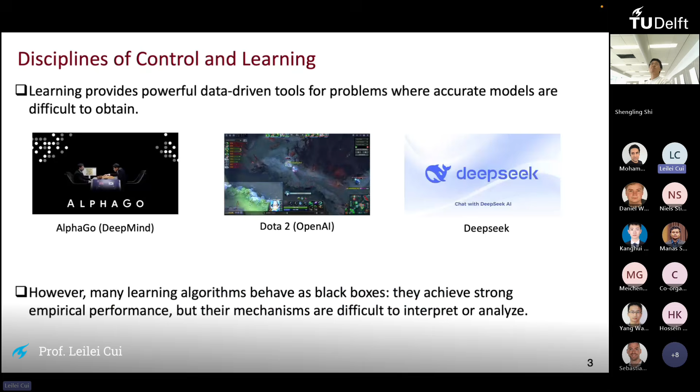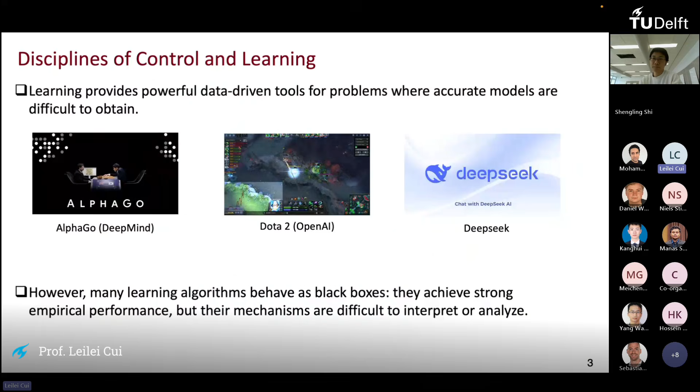For this kind of scenario, there is no model, but the data-driven method had very good performance. Even now we have very good success in the application of learning, but our understanding or knowledge about learning lags behind the development of learning. Many learning algorithms behave as a black box, achieving very good empirical performance, but their mechanisms are very difficult to interpret or analyze.

Based on the advantages and disadvantages of these two disciplines, my perspective is: how can control benefit learning, and vice versa, how can learning benefit control? On the one hand, we have different kinds of ideas in control theory. Can these well-established tools be applied to learning, or to better understanding learning algorithms?

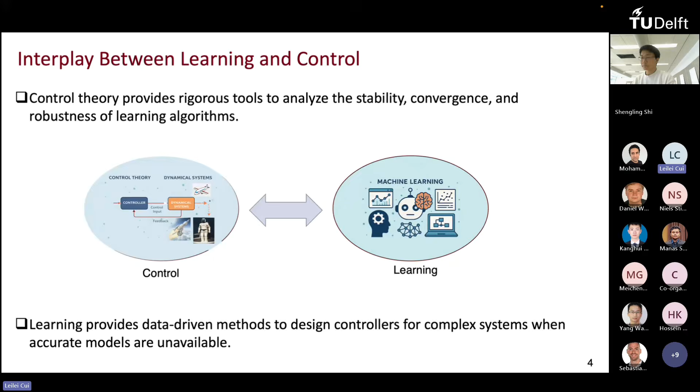On the other hand, even in the learning field, even without a model, we can have very good performance. Can we bring this idea to control and propose some data-driven solution to controller design? For example, even without a model, can we directly learn from data the best controller? That's another direction, from learning to control.

Within this intersection, I have done some work. The first direction is control for learning. Different people may have different ideas and perspectives on this, but from my perspective, I think control is a very good tool to analyze the robustness of learning algorithms.

Usually, learning algorithms depend on data, and usually data is noisy. How can a learning algorithm perform under the influence of noisy data? It should degrade elegantly in the face of perturbation—that's the purpose of robustness of a learning algorithm. In this direction, we propose a framework under input-to-state stability, and based on this framework, we study the robustness of policy optimization algorithms and even adversarial reinforcement learning algorithms.

In the other direction is learning for control. Reinforcement learning, especially, can help us directly learn from data the optimal controller. This controller not only should be optimal, but also should be stable. In this direction, I propose some algorithms for time delay systems and for output feedback systems.

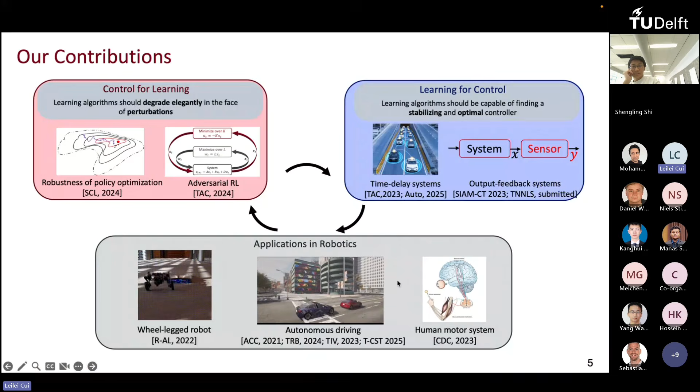In terms of applications, I have applications of data-driven control in robots and autonomous driving, and we also use reinforcement learning algorithms to explain computational neuroscience, proposing some ideas in computational neuroscience in terms of human motor systems. Okay, so today let's begin the first part of today's talk.

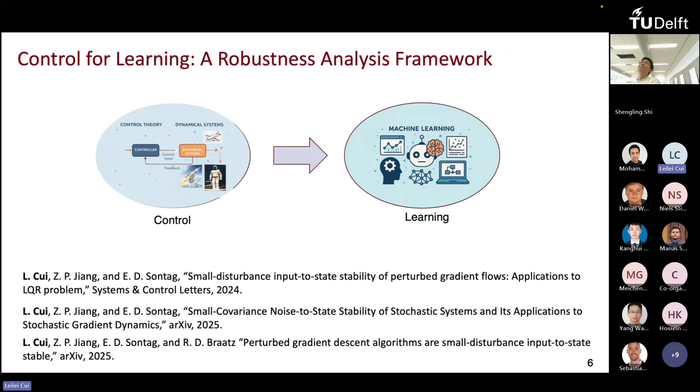The first one is control for learning. Here, as I mentioned, we propose some ideas based on input-to-state stability to analyze the robustness of learning algorithms. Today's talk is basically based on these three papers, a collaborative work with my PhD advisor, Zhongping Jiang, and Eduardo Sontag, and also with my postdoc advisor, Richard Braatz.

I wanted to study the behavior of learning algorithms. But in machine learning there are so many different kinds of learning algorithms—so where should we start? I think even though there are various learning algorithms, the fundamental solution is optimization. Even for classic learning algorithms like classification or regression, or later for reinforcement learning, supervised learning, or even unsupervised learning, they all come from an optimization algorithm.

For example, for backpropagation in deep neural networks, we use gradient-based algorithms to solve the optimization problem. So we aim to study the following optimization problem: J is our loss function or objective function, D is the domain of this objective function, and k is the decision variable. We want to find the k such that J is minimized. Of course this problem is typically non-convex—if it were convex we'd have very good properties, but generally this function is non-convex.

To solve this problem, we have a very simple and very useful algorithm to find the optimal solution iteratively: the gradient-based method. Gradient-based methods are very powerful but very simple—at each step we just move along the gradient descent direction, and by this way we can ensure that the cost or loss function can be minimized iteratively. From here we can see that if eta, the step size, is super small...

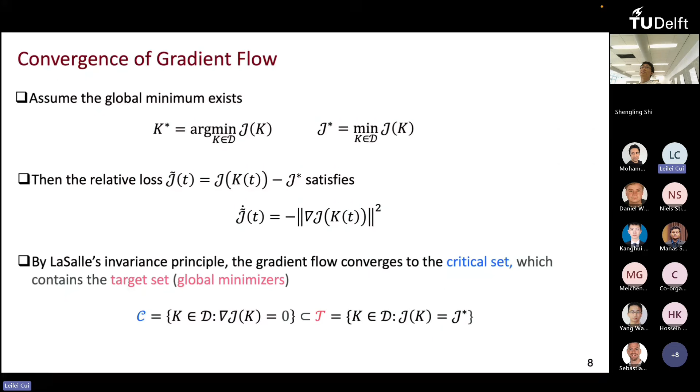Actually, we wanted to find the global minimizers, but due to the limitations of the gradient-based method, usually we can only converge to the critical set, the points where the gradient should be equal to 0. So that's some basic introduction of the gradient-based method.

But here, as I mentioned, this part is usually implemented by our algorithm. For example, there may be some oracle - you ask your oracle, and the oracle will give us some estimation. Or maybe it is a digital twin, so we can ask a digital twin about the estimation of the gradient, and then it will tell us the result. Or maybe in this part there is some data - even though we don't know the model and can't get the exact gradient, the data would help us to calculate the gradient. So in a word, in machine learning, usually the gradient should be estimated by some algorithm.

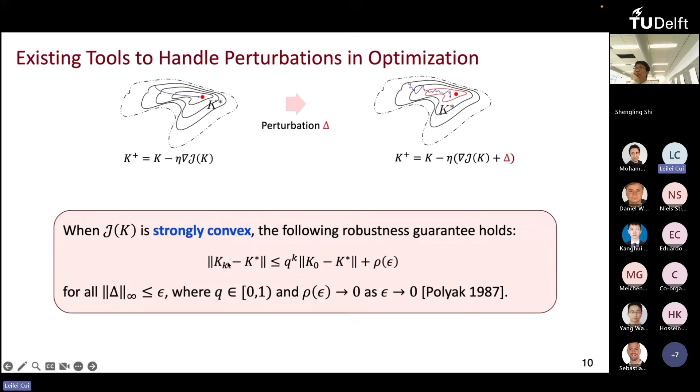Next, of course, there are many other brilliant works. The second work is done by Bertsekas and Tsitsiklis around 2000. In their work, they assume that the noise should converge to 0. As we can see, eta is the step size, so they assume that the step size should converge to 0.

If the step size converges to 0, based on this equation, we find that the perturbation should also converge to 0. So in their work, if the perturbation converges to 0, they can also ensure that the gradient converges to 0 too. Okay, so that's another work.

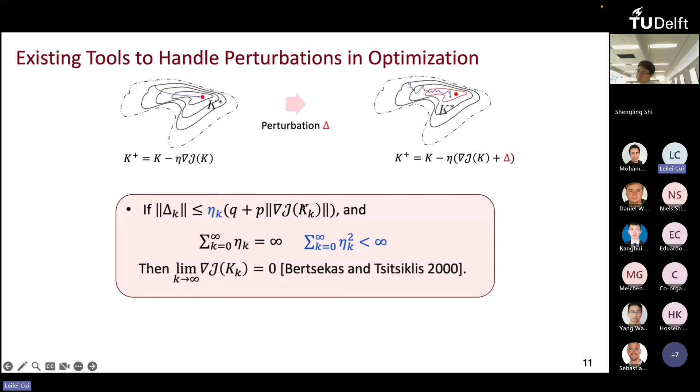But here the limitation is that they assume convergent noise. We can see here it requires the convergent noise assumption. In both of these works, the first assumption is strong convexity. But in many practical problems, many optimization problems are non-convex, let alone strongly convex.

So for example, here I will give you an example: the policy optimization for the linear quadratic regulator problem. Here we want to optimize the feedback gain K. The set of stabilizing controllers, or the feasible set, is non-convex. Look at this figure — the blue region is the feasible set and the yellow one is the non-stabilizing or non-feasible set. We can see that the feasible set is non-convex, and therefore this kind of problem is non-convex.

Secondly, in data-driven control, the assumption of vanishing noise is often unrealistic. It's hard to say that after a long time, the noise will tend to zero, that the noise will vanish. From our understanding, noise would be there all the time, so this kind of assumption would be too strong to be satisfied by real scenarios.

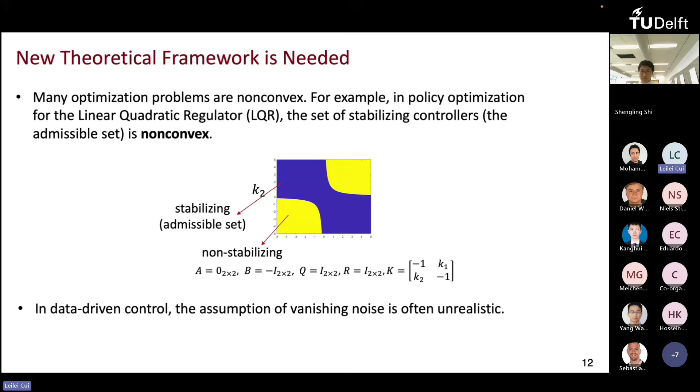So how can we propose some new ideas to solve this problem? How can we propose new ideas to study the gradient descent algorithm under the influence of noise? The first technique we introduce is input to state stability, to quantify robustness. Robustness is a kind of quality property, but how can we quantify it? Here we use input to state stability.

I think, because I'm a control researcher, the first concept I learned in control is Lyapunov stability. Lyapunov stability tells us that for any dynamical system without noise — so here without input, there is a zero input — if my Lyapunov function is negative definite, I can ensure that the trajectory of this dynamical system would converge to zero. In other words, it is asymptotically stable. That's the classic Lyapunov stability.

But as I mentioned, we wanted to study the behavior of gradient-based methods under perturbation. The classic Lyapunov stability only ensures asymptotic stability under zero input or zero disturbance. On the other hand, input to state stability can incorporate the influence of the noise.

So here on the right-hand side, W is non-zero input or non-zero disturbances. For input to state stability, we still have a similar dissipativity, like a Lyapunov condition. So in order to ensure input to state stability, we should still ensure that the derivative of the Lyapunov function should be negative, or more strongly, smaller than a K infinity function. But under the influence of noise, we should have an additional term.

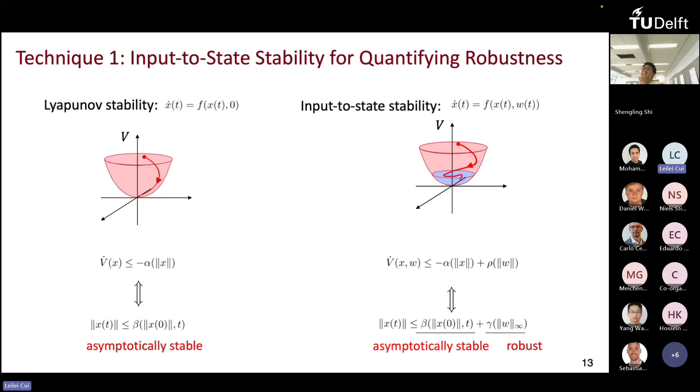That's why we should use input to state stability to quantify the robustness of the gradient-based algorithm. The second technique we use is generalizing the classic Polyak-Łojasiewicz condition. The PL condition was proposed around 1963, and it is used to guarantee the convergence rate of the gradient-based algorithm.

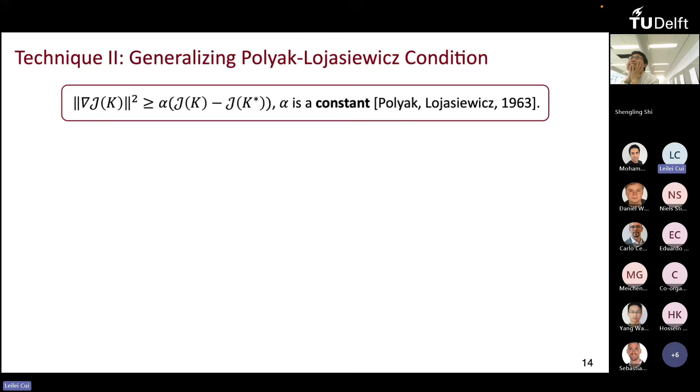So basically, the PL condition, or as some people like to call it, the gradient domination condition - here we can see that the gradient will dominate the relative loss function. The x-axis is the relative loss function, and the y-axis is the gradient. We can see that the gradient is larger than the relative loss function by a linear function, where alpha is some constant.

So if this kind of PL condition holds, we can easily derive that our relative loss function will converge to the optimality exponentially. But if we move a step further, we find that if this kind of linear Polyak-Łojasiewicz condition holds, then the gradient descent algorithm is exponentially input-to-state stable. So here we can see that without noise, in this equation, the algorithm will converge to the optimality exponentially.

But with noise, it will never converge to the equilibrium or to the optimality, but will converge to some neighborhood of the optimality. Here, gamma determines the size of our neighborhood. This can be easily proved by using this as the Lyapunov function.

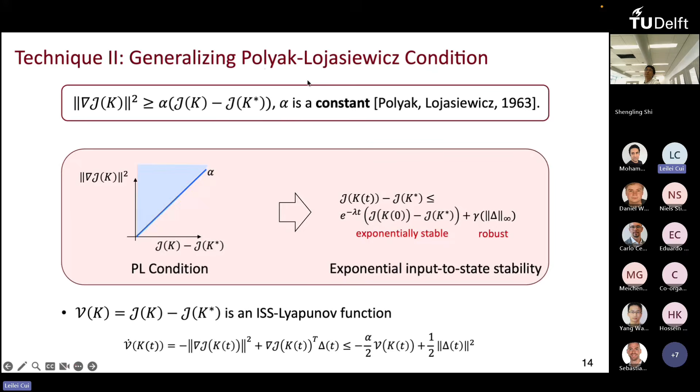We can see that the classic PL condition requires that the gradient is larger than the relative loss by a linear function. But as we know, in reality, linear relationships rarely happen, because a linear function is usually an idealization of our research, of our human understanding. But in reality, most properties of most things are nonlinear. So the question is, how can we generalize the PL condition such that it fits a broader range of problems?

That's the motivation for the K infinity PL condition. Based on the PL condition, we generalize to the K infinity PL condition. It's still the same equation, but here we only assume that alpha is a K infinity function, which implies that this alpha function is strictly increasing from 0 at 0 and tends to infinity. That's this kind of K infinity PL condition.

Actually, it is a weaker condition than the linear PL condition. We can see in this figure it is not a linear function anymore. Of course, if alpha is a linear function, it will imply the K infinity PL condition. Therefore, the K infinity PL condition is a generalization of the linear PL condition to the nonlinear version.

So if this kind of PL condition is satisfied by the cost function, then we can ensure the input-to-state stability of the gradient flow. In other words, without noise, the learning or gradient-based algorithm is asymptotically stable. But under the influence of noise, it will still converge to a neighborhood of the optimality.

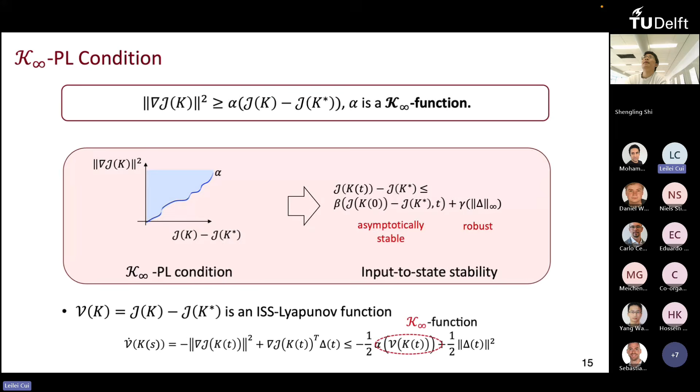But usually this kind of condition still can't be satisfied. So here I will give an example to show that the developed K-infinity PL condition is still too strong in some cases. Let's consider this optimization function, this loss function. We wanted to optimize the function at this kind of form - this is the objective function we wanted to optimize.

The right-hand side is the explicit formula for the gradient. We can plot this, because for this optimization problem it's very simple - it's like a toy example. We can directly scratch down the figure between the gradient and the relative loss. In the figure, we see that the gradient saturates when the relative loss tends to infinity. We can see that it saturates at 0.25.

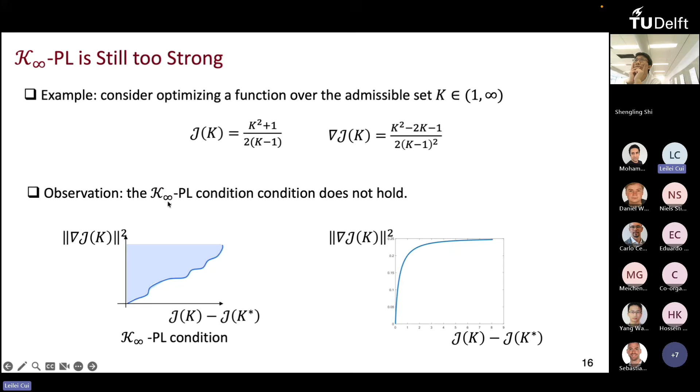That's the saturation value. But as I mentioned, in the developed K-infinity PL condition, it should be unbounded when the relative loss tends to infinity. So for this kind of problem, it can't satisfy the K-infinity PL condition. In other words, the K-infinity PL condition is sometimes too strong to be satisfied. Therefore, we should develop new conditions to relax the K-infinity PL condition. So that's the motivation of the KPL condition.

So for the KPL condition, we still have this kind of relation, where the gradient should dominate the loss function by some alpha function. This alpha is some function, but here we only require alpha to be a K function, which means it is 0 at 0 and strictly increasing - it can be bounded. Therefore, it is a relaxation of the K-infinity PL condition.

So if this kind of PL condition is satisfied, we find that the gradient algorithm has small-disturbance ISS. In other words, under this scenario, the noise should be bounded by this threshold. If the noise is smaller than this threshold, we can still have a very good robustness property, which tells us about the asymptotic stability of the algorithm. In other words, if noise is smaller than this threshold, the gradient algorithm can still converge to optimality asymptotically, but under the influence of noise, it will converge to a neighborhood of the optimality.

Of course, the size of the neighborhood depends on the magnitude of the noise. So that's another relaxation of the PL condition to the KPL condition.

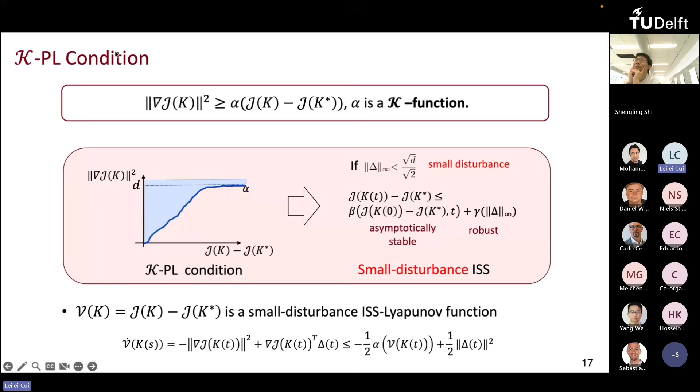So moving along this line, we can relax the PL condition again. In the KPL condition, we require the monotonicity of the alpha function. For the PDPL condition, alpha is only required to be positive definite, meaning it is 0 at 0 and positive when the relative loss is larger than 0.

Of course, under this scenario, we can ensure integral input-to-state stability, which means the gradient algorithm will converge to a neighborhood of the optimality, and the size of the neighborhood depends on the energy-like function of the noise. That's the idea of integral input-to-state stability.

So now we introduce the framework of the PL condition and input-to-state stability to analyze robustness of the algorithm. Now let's apply the developed framework to different kinds of problems.

So for this problem, we consider the policy optimization of the LQR problem. I think LQR is very classic. We wanted to minimize - we wanted to design a controller K such that the state of the system will be driven to 0 as soon as possible, but with less energy. This term denotes the energy of the inputs.

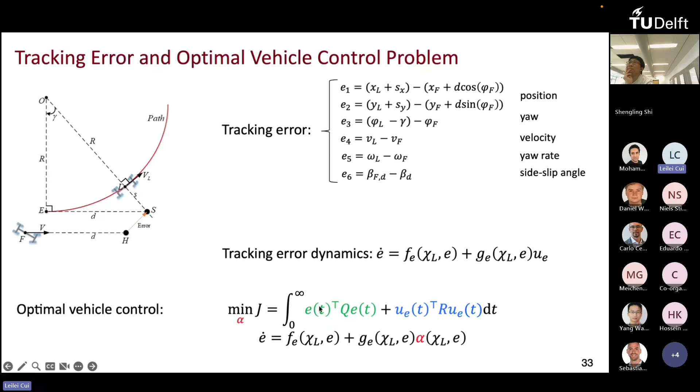This is tracking error for the virtual point, so that's the tracking error dynamics. We should design the controller such that the tracking error and the control input can be minimized to improve the performance and minimize the energy consumption. So here we develop the learning policy iteration algorithm to learn the optimal controller.

Different from classic reinforcement learning algorithms, here we consider the model of physics of the vehicle. Therefore we can ensure the algorithm is asymptotically stable, the controller learned by the proposed learning algorithm is globally asymptotically stable, and the value function is monotonically decreasing, which implies our performance is better and better. So that's the development of data-driven policy iteration.

So that's the result of the learning-based controller. The red vehicle is the leading vehicle, and the blue one is the autonomous vehicle or the following vehicle. We can see the follower will follow the leading vehicle very closely, but keep a very safe distance.

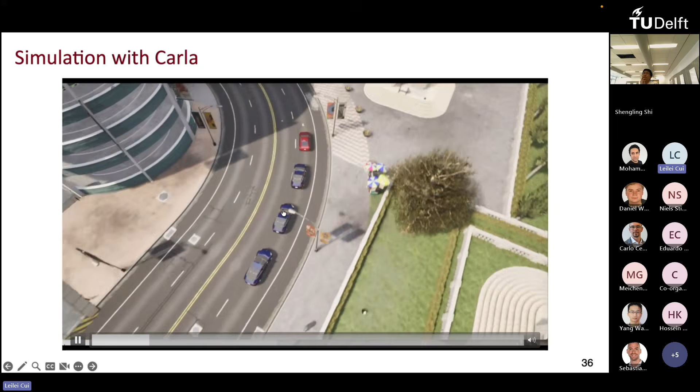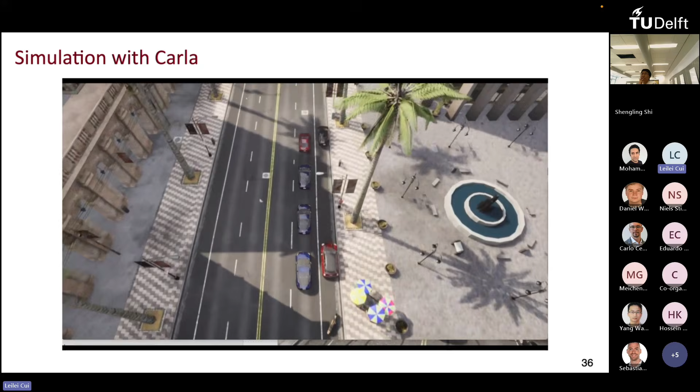We can also extend this idea to multiple vehicles. Here we can see there are 3 followers, and these vehicles are following the preceding vehicle. We can see that these autonomous vehicles can still keep a safe distance from the preceding vehicle and at the same time keep the lane. It will stay in the lane.

We also extend the idea of learning-based control to robotics. For example, we developed this kind of wheeled bipedal robot, where there's a wheel attached to the body of the robot. This kind of robot can operate under different modes, for example the general mode or the energy saving mode, which means the height of the robot can change. There is also a second tail which can serve as a 3-wheeled mode, and finally we can mount some manipulators on top of the robot.

Our task is to design the torque applied to the wheel such that the robot can be balanced. For this kind of task, we design the state, including pitch angle, angular velocity, and longitudinal velocity, and then define the quadratic performance index. We propose a data-driven value iteration algorithm to directly learn the optimal controller for this kind of system. Of course, since this is a data-driven algorithm, we require data from the system.

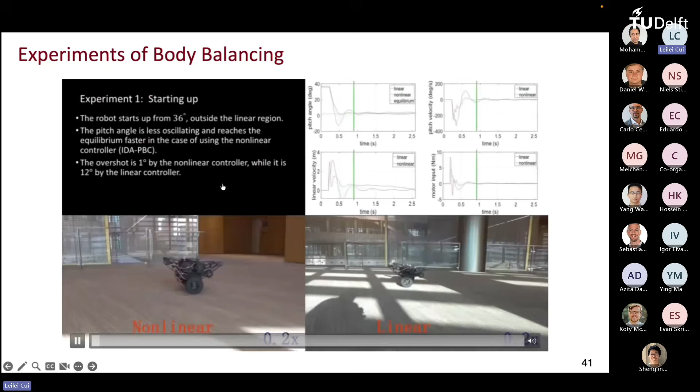Here are some results of the data-driven controller. The first result is starting up, and second is rotating. We can see that the robot is balanced very well by the learning-based controller.

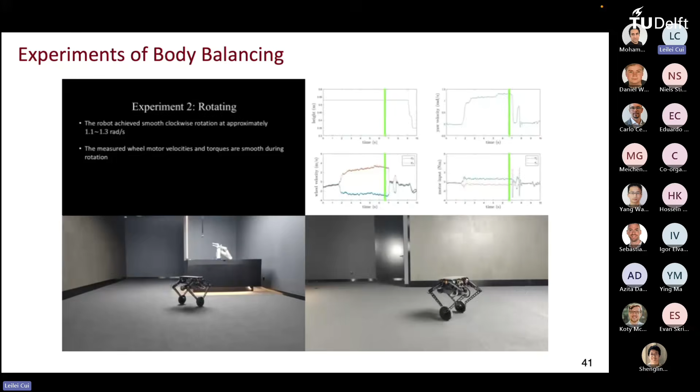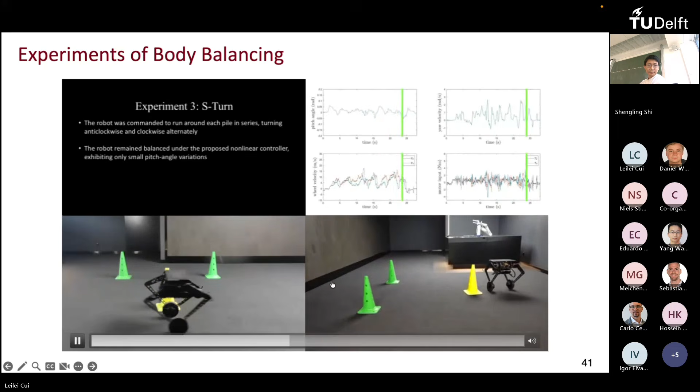The robot can still be balanced well when it is moving along some curves. And finally, in this scenario, we can see that the robot is balancing itself when its height is changing, to pass through these cones.

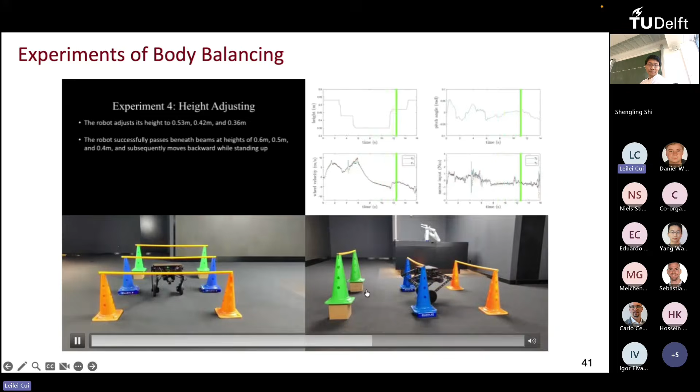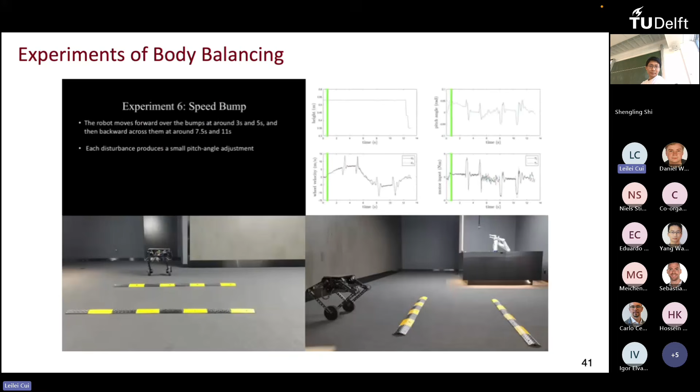Finally, when someone is kicking the robot, under this external disturbance, it can still be balanced well. And when the robot is moving through some speed bumps, it can still be balanced well.

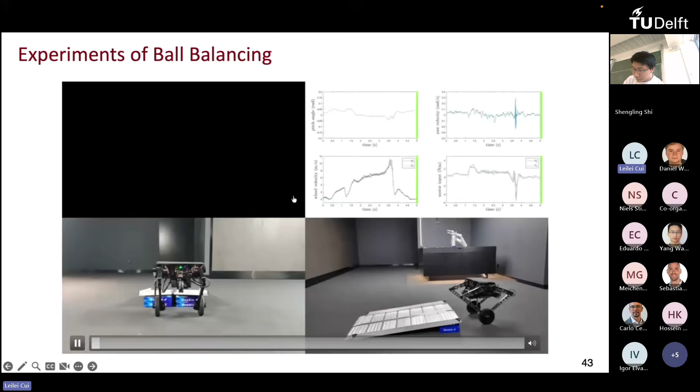By combining learning-based control with whole body control, we can also achieve more complex tasks. For example, here we not just balance the robot, but also balance a ball. This ball is on the top of the robot. If the control performance is not good enough, this iron ball will fall out of the robot.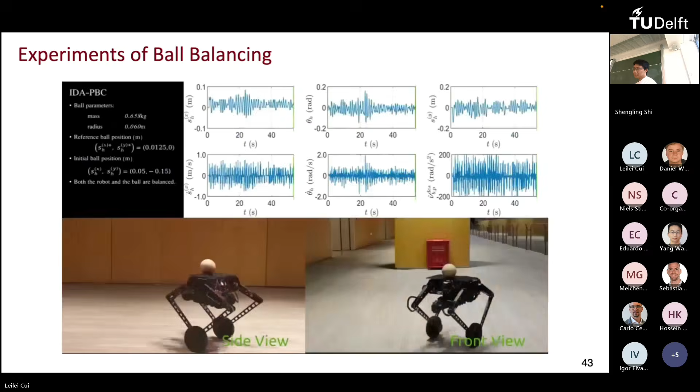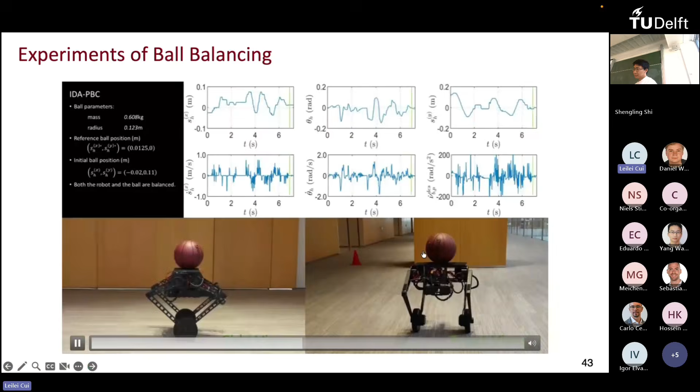We can also balance the ball if the material of the ball is changed, from iron to wood. That's a comparison between our controller and PID control. We can also balance a basketball, and we can also balance the ball when the robot is moving along some curves.

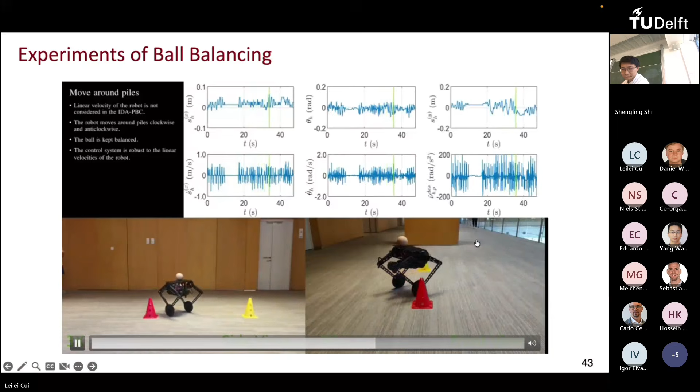And finally, another scenario is when the robot is moving over some obstacles or over some slopes, the ball can still be balanced well.

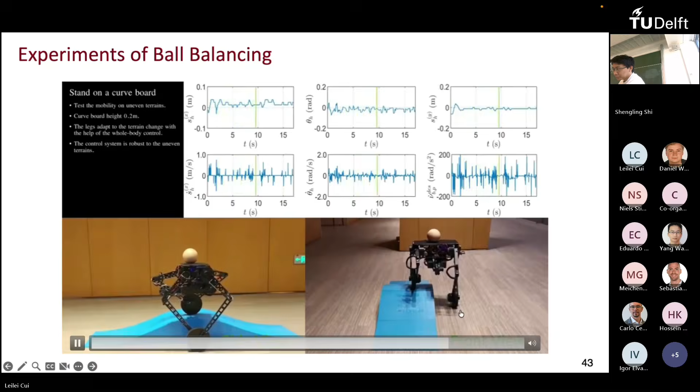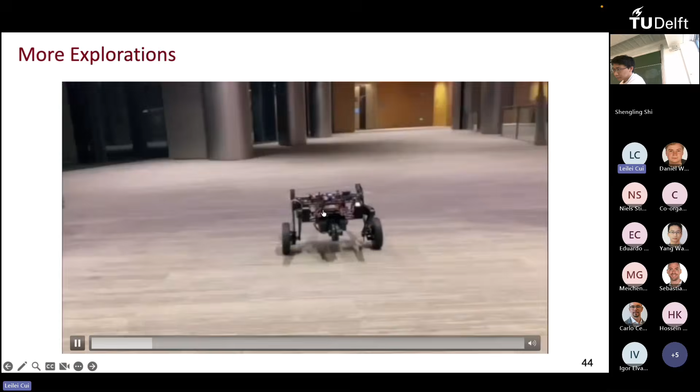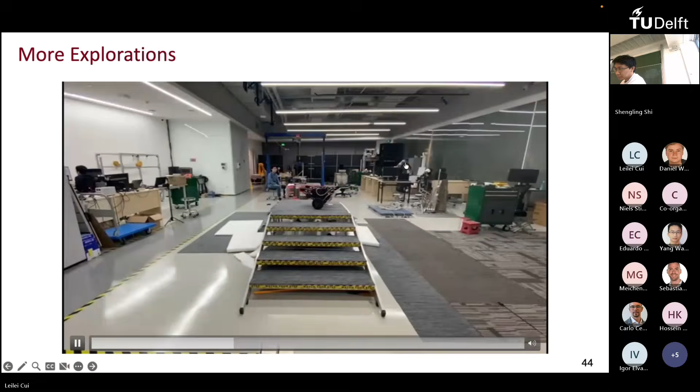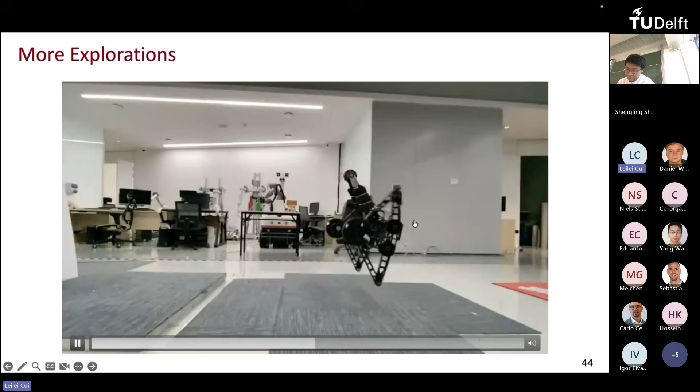We also explore some other experiment scenarios, for example passing through obstacles, jumping over a rope, jumping over some platform, moving downwards through the stairs, and performing a somersault. That's the learning-based control and the whole body control working together.

Okay, so we also studied reinforcement learning algorithms as a theory of human-centered motor control. Due to time limitation, I will end my presentation here. So in today's presentation, theoretically, we started with robustness analysis of the gradient learning algorithm, and we considered the dual loop policy optimization algorithm for the zero-sum dynamic game, learning-based control for output feedback systems, and learning-based control for time delay systems. In terms of applications, we talked about car following control, balance control for wheel-legged robots, and human-centered motor control. So that's it. Thank you for attending. Let me know if you have any questions so we can discuss.

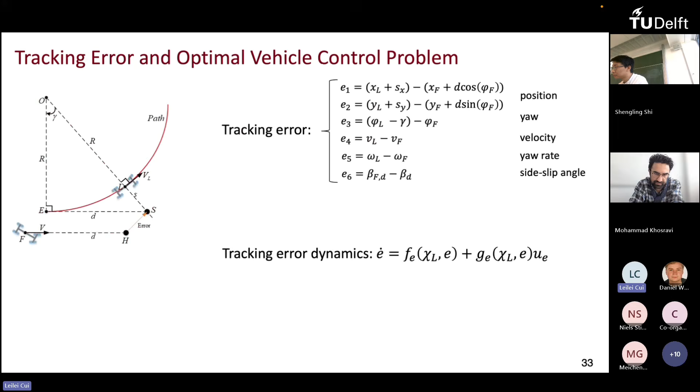Yes, okay. So here I think regarding restrictive, we should assume there is a global condition, so maybe we can go back to the PL condition. We tried our best to generalize the classic PL condition, but there are still other restrictive aspects, for example alpha here. If there are some local minima, other stationary points, this kind of condition can't be satisfied. So that's another restriction or drawback of this approach. For example, if there is a point where the gradient equals zero on the left-hand side but the right-hand side is non-zero, meaning relative loss is non-zero, then this PL condition can't be satisfied, and we can't use it to analyze results globally. If there are multiple stationary points, maybe we should analyze robustness locally. So that's one restriction.

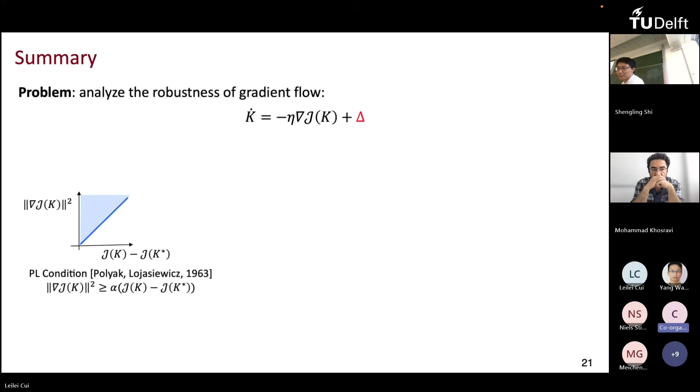Okay, maybe I can add one, Leilei. You mentioned you extended your result to the stochastic setting with Brownian motions. I'm wondering, because normally in machine learning optimization they use stochastic gradient descent where they estimate the gradient using a subset of data, do you think this Brownian motion setting covers that case? Yes, of course, I think you're right. Usually for stochastic gradient methods or batch/mini-batch gradient methods, we should introduce stochastic noise, so I think this can also solve this kind of problem, because if sampling is stochastic, the noise should also be stochastic.

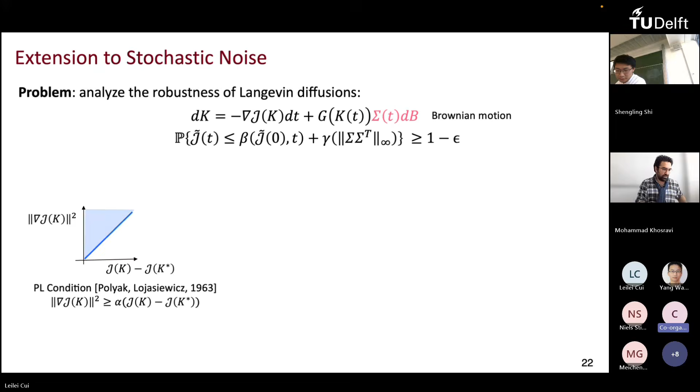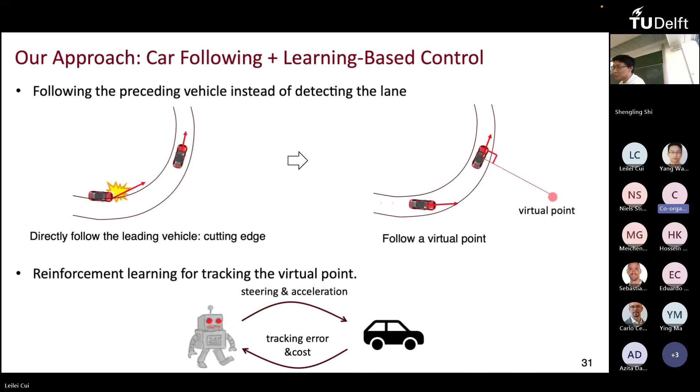Okay, great. And then maybe a second question is about the robotics application, because you mentioned you have this data-driven controller, but then you showed a lot of wonderful tasks achieved by the robots. So I'm wondering, what's the role of the learning-based controller? Is it a tracking controller? Do you need an additional planner for all the tasks you've shown?

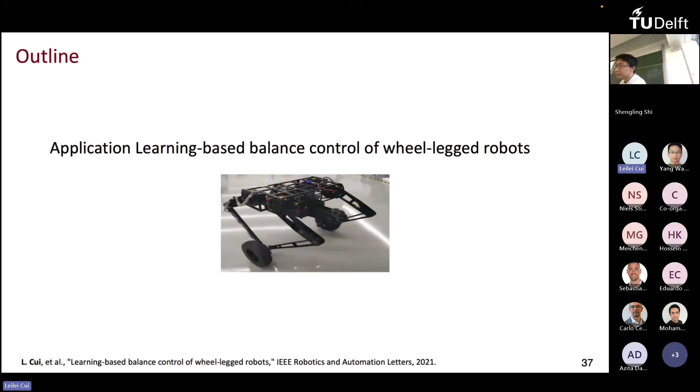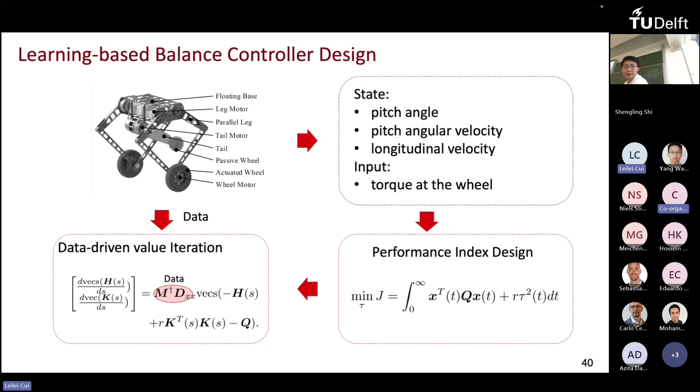Oh yeah, that's a very excellent question. For the learning-based control, our role is balancing, because balancing is a fundamental function for wheel-legged robots. This includes balancing of the body, or even balancing with balls, another related problem. These are achieved by the learning-based control. Of course, later we see many fancy somersaults or even jumping, and for those there is a planner part. So we incorporate planning, robotic control, and learning together to achieve these more complex tasks.